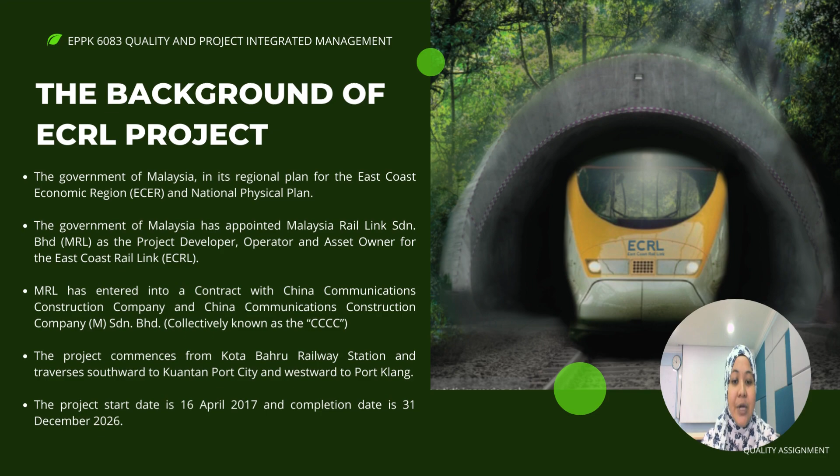Next is the background of the ECRL project. The Government of Malaysia, in its regional plan for the East Coast Economic Region and National Physical Plan, has appointed Malaysia Rail Link Sdn Bhd (MRL) as the project developer, operator, and asset owner for this ECRL. MRL has entered into a contract with China Communication Construction Company and China Communication Construction Company Sdn Bhd, collectively known as the CCCC. The project commences from Kota Bahru Railway Station and traverses southward to Kuantan Port City and westward to Port Klang. This project's start date is 16 April 2017 and it will be completed by 31 December 2026.

As you can see, this is the project layout for ECRL.

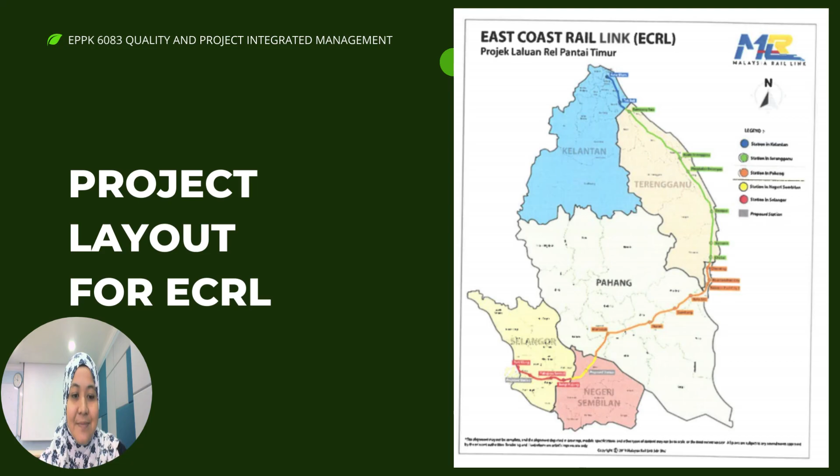Next is the budget and cost of ECRL. We divide it into three phases, 1.0, 2.0, and 3.0, because of the changes in government in Malaysia during those particular times. The first one, when the mega project started in 2017, the cost is 85.97 billion, and during that time Dato' Sri Haji Mohammad Najib bin Razak was the prime minister.

Next is ECRL 2.0 in 2018. The cost is 66.02 billion, and during this time Tun Dr. Mahathir bin Mohamad was the prime minister. The latest one is ECRL 3.0, which started in 2022, and the cost increased slightly to 74.96 billion, with Anwar Ibrahim as the prime minister.

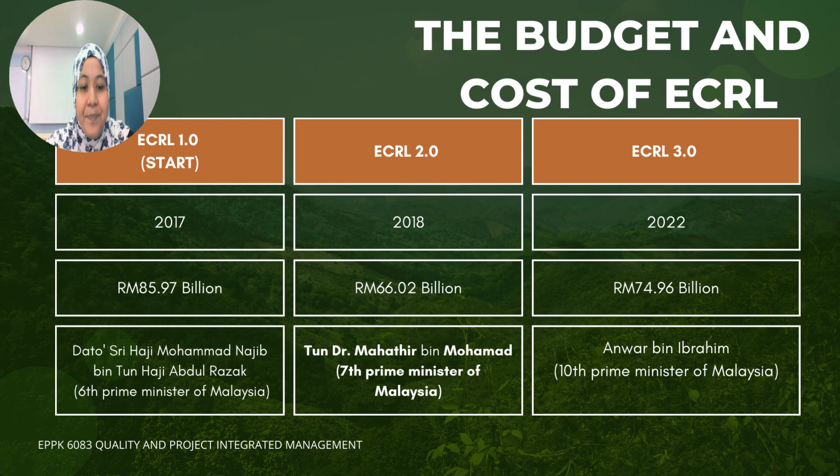For this slide, it shows how the cost is calculated, how the cost happened from the previous slide, according to original cost, amended cost and latest cost are related to construction cost, operating expenditure, and interest. That is what makes ECRL 1.0, 2.0, and 3.0 different, going up and down.

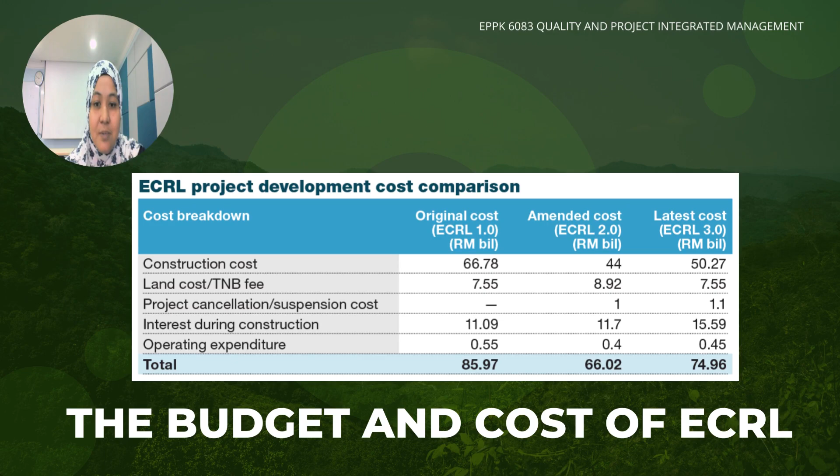Next is the constraints faced in this project. We can divide them into two, internal and external.

This slide shows the constraints in the internal context. We have three: the first is quality conformance of materials, with a minor risk level. The second is direct sunlight and high temperature or heat during operation, with a moderate risk level. And the critical risk level is supply not being timely.

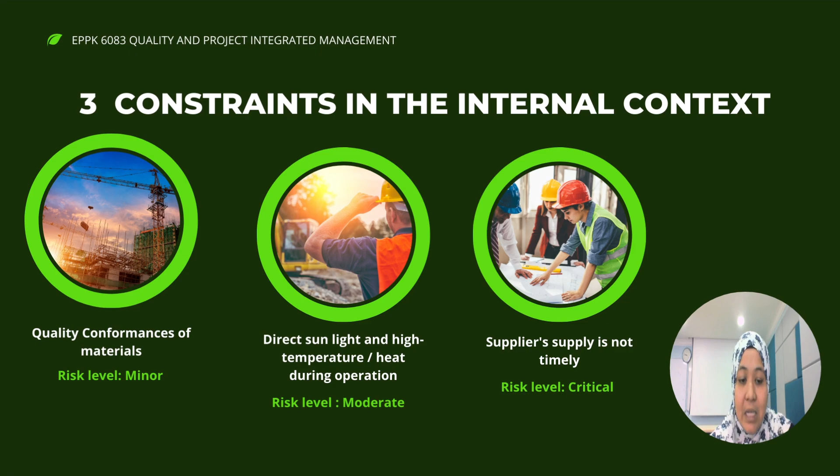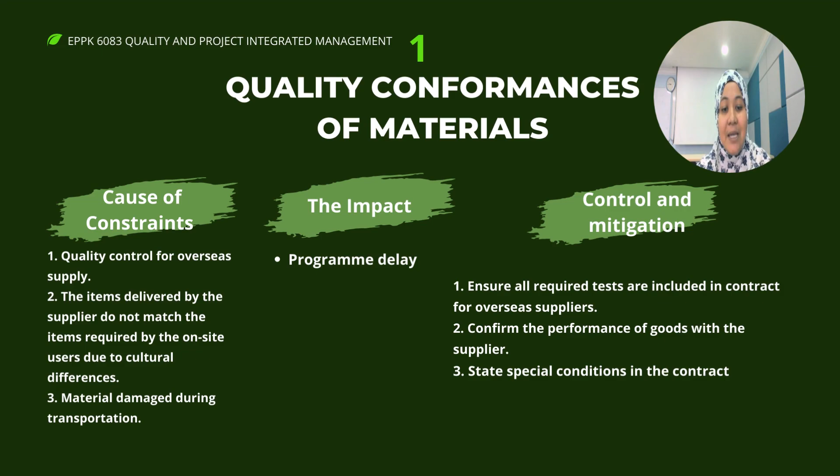The first one is quality conformance of materials. The causes are quality control for overseas suppliers, items delivered by the supplier not matching the item required by the on-site user due to cultural differences, and material damage during transportation. The impact from this constraint is program delay. To solve this, the control and mitigation measures are: ensure all required tests are included in the contract for overseas suppliers, confirm the performance of goods with the supplier, and state special conditions in the contract.

The second is direct sunlight and high temperature or heat during operation. The causes of constraint include inadequate monitoring of workers' health, inadequate job rotation of workers, lack of rest areas and sample water at the work area, and lack of awareness. The impact from this constraint is on time, cost, and the health of personnel.

How to control and mitigate this problem: close supervision to monitor workers' health condition during work, first aiders and first aid also provided at the workplace. Next, preventive safety measures are taken to ensure workers are not exposed to the hot sun for long hours by implementing job rotation of workers, so shifts can be done. Next, all employees are given pre-task training and refresher training on the hazard and control, and employees are advised to use long sleeve jackets at work.

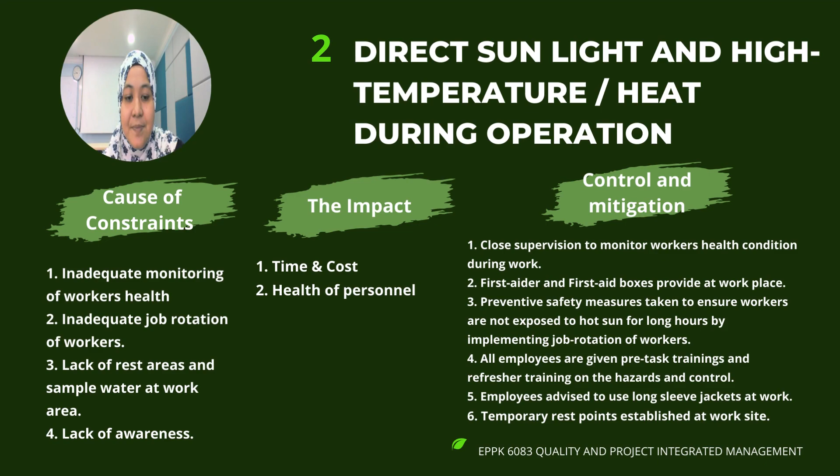Okay, the third constraint is supply is not timely. The cause of this constraint is poor planning, poor logistics, and many public holidays causing delivery delay, especially in Malaysia.

The impact is on time and cost. Delayed supply affects the construction and production process, and lengthens the procurement cycle.

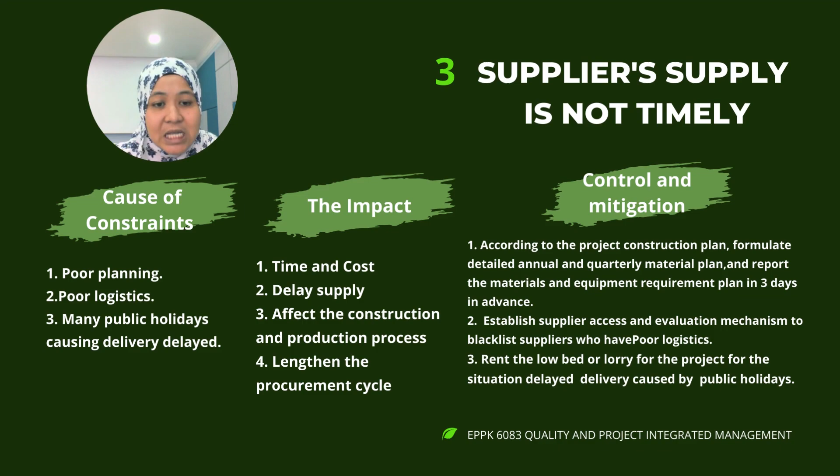So how to solve and control this problem? According to the project construction plan, we formulate detailed annual and quarterly material plans and report the material and equipment plan 3 days in advance. We also establish a supplier access and evaluation mechanism to blacklist suppliers with poor logistics, and lastly arrange low bed or lorry transport for situations where public holidays cause delivery delay.

Next, we have three constraints in the external context: manpower shortage and COVID risk, with a major risk level; possible delay due to monsoon season, also major; and insufficient supply of material, which is very critical.

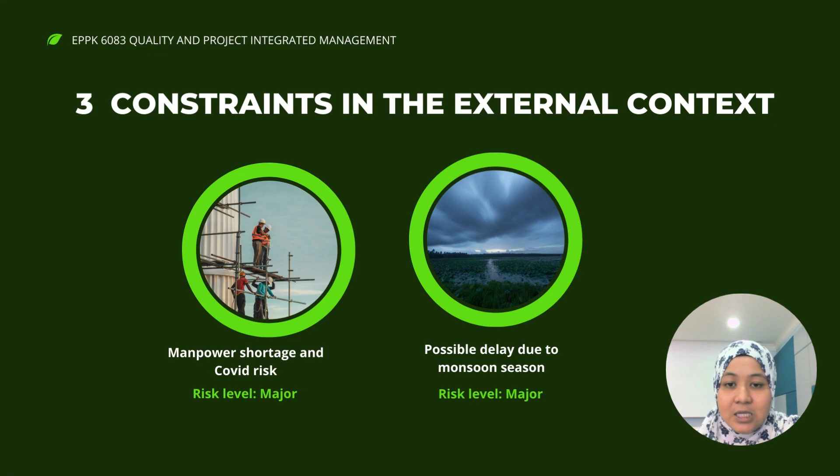The first one is manpower shortage and COVID risk. The cause of this constraint is travel restrictions on foreign construction workers due to international border control caused by COVID-19, much longer processing time and approval by authorities for visas and work permits, and the local young generation being reluctant to apply for jobs in Maran.

The effect of this problem is that the construction work process may be delayed, increasing time and cost of the project. Next is how to control and mitigate this.

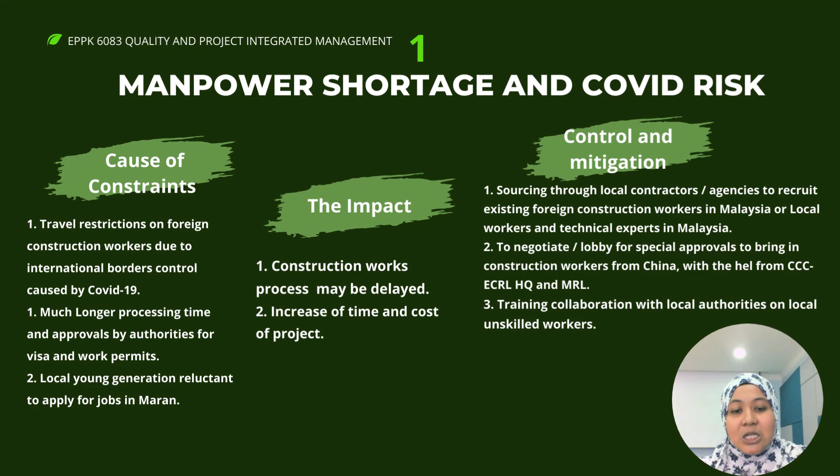We source through local contractors or agencies to recruit existing foreign construction workers in Malaysia, or local workers and technical experts. We also negotiate or lobby for special approval to bring in construction workers from China, coordinating with CCC-ECRL HQ and MRL. Next is training collaboration with local authorities for local unskilled workers.

The second one is possible delay due to monsoon season. As this project is on the East Coast, it will impact the project. The cause is unusual flooding likely to happen, referring to flood history from December 2020/2021 to March 2020/2021. Monsoon season usually happens in the East Coast region from November to March every year, and is likely to cause flooding in the east coast region.

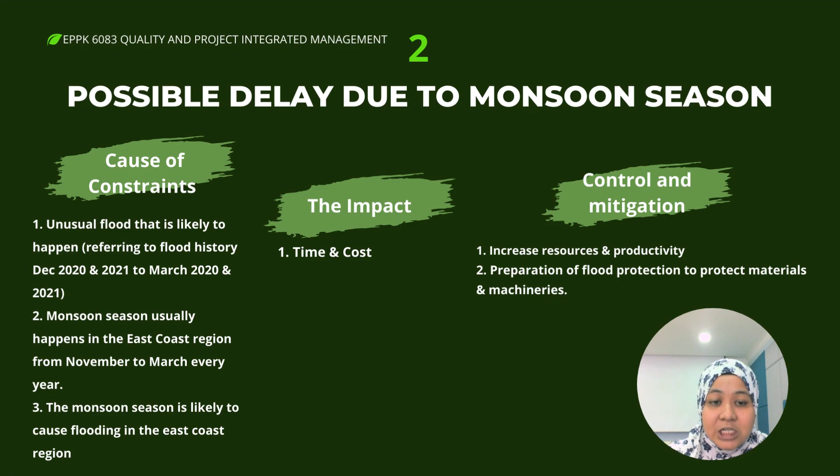The impact of this constraint is on time and cost. To control and mitigate it, we increase resources and productivity, and prepare flood protection to protect materials and machinery.

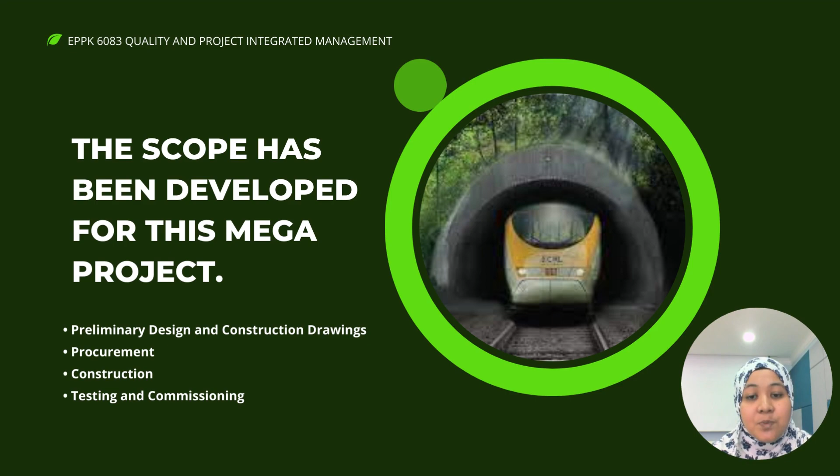The scope developed for this mega project includes preliminary design and construction drawing, procurement, construction, and testing and commissioning.

This mega project is still ongoing. The project start date is 16 April 2017, and the completion date is 31st December 2026.

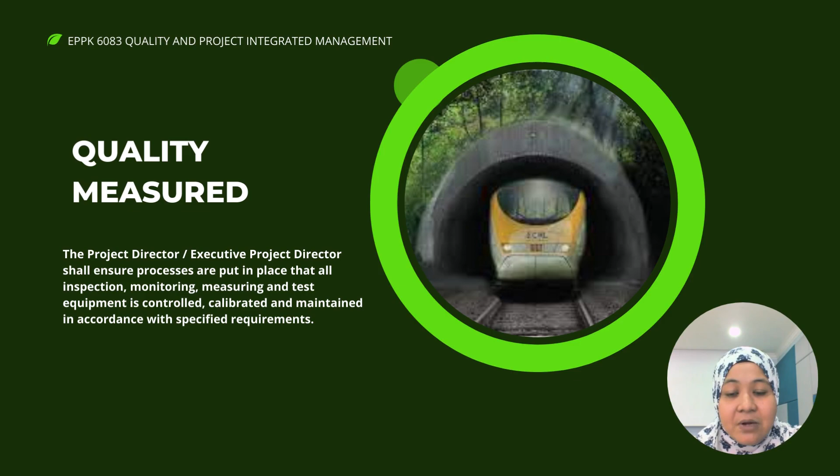For quality measures, the project director or executive project director shall ensure processes are put in place so that all inspection, monitoring, measuring, and test equipment are controlled, calibrated, and maintained in accordance with specified requirements.

Last but not least, the conclusion for this mega project presentation is that quality management can be applied in terms of problem solution. We must understand both the cause and the impact of the problem. From there, we may address the problem by connecting people, methods, and measures. A solution is also required within a specific time frame. Thank you.